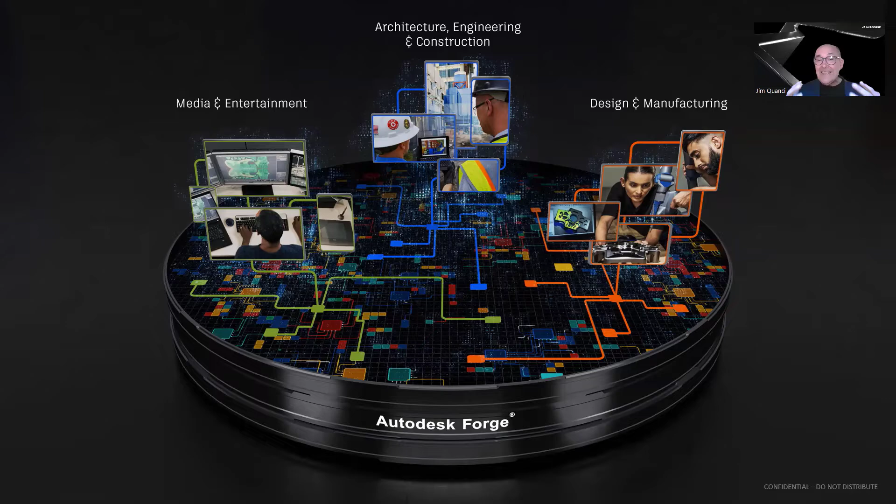for faster, better decision-making. And better, faster decision-making means fewer mistakes, increased safety. It means more profitability. It means giving your customers the ability to delight their customers with the ability for the customers to see what's happening, creating transparency that customers are not used to, because your customers, they don't have a CAD desktop. They may not have a license to one of the Autodesk products, but they need that data to be more effective, to help their business be more successful.

Okay, this is an old slide. What are people doing with the Autodesk platforms? Data visualization, dashboards, still the lead thing that people do with Autodesk platforms once you get beyond the desktop.

Digital twins, all that great digital twin information created on the desktop, but then needs to be shared through dashboards, through pipelines of near real-time data coming from AWS, Azure, Google Cloud, whoever your favorite IoT digital twins provider is.

Pipelines for AR, VR, SaaS integration, whether that's ERP, CRM, or BIM 360 Autodesk Construction Cloud, parts catalogs, configurators and design automation, which very much are about reducing time for designs to get done, whether that's somebody internal to a customer, saving lots of hours in design work, or whether it's enabling your customer to give their customer a delightful, easy configurator experience that dramatically speeds up time from design exploration, looking at your customer's products, to actually placing an

order and it's shipping, that data going direct data form, not files, not drawings, to the shop floor or to the fabrication area in preparation for going out to a construction site.

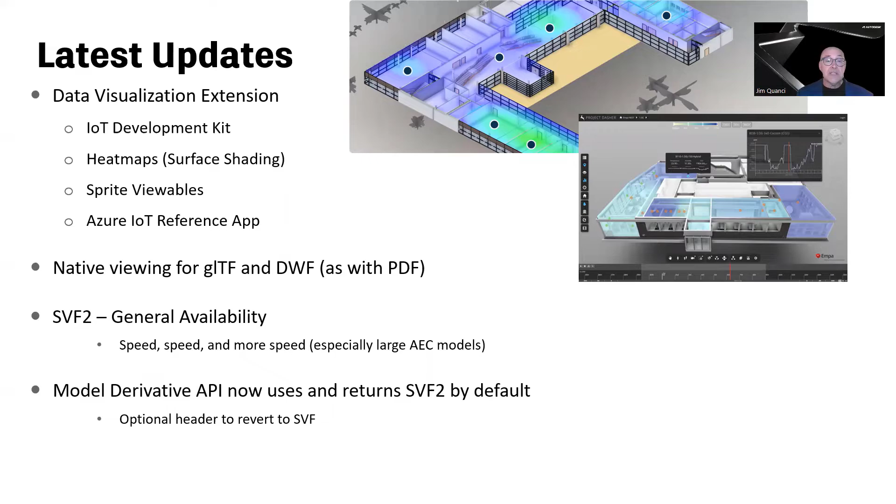What else is coming? Data visualization extension - we're not done. There are a few things left over. People wanted streamlines, easy streamlines - working on that.

Updated three.js. Those of you who use the viewer may have used the underlying three.js, which for the viewer has been at release 0.71. That release, is it 5 or 6 years old? It's aging. The open source community for three.js has built a lot more capability and connectors for it. So Autodesk has recognized we need to leverage the open source community, not resist it, but embrace it. So you should know we are actively working on updating the Forge viewer to support near the latest version of three.js - last time I looked, maybe it was 1.31, 1.32.

We'll see in the next few months - very soon now we will release a new version of the viewer that supports a much newer version of three.js, with the plans, infrastructure, and tooling in place for us to stay up to date. Now, we won't always be up to date with the latest version of 3JS that came out this month - there will be a couple of months lag time for our support of new versions. But I know those of you who use 3JS, hopefully this will really liberate your creativity to leverage a lot of the great plugins and extensions to 3JS.

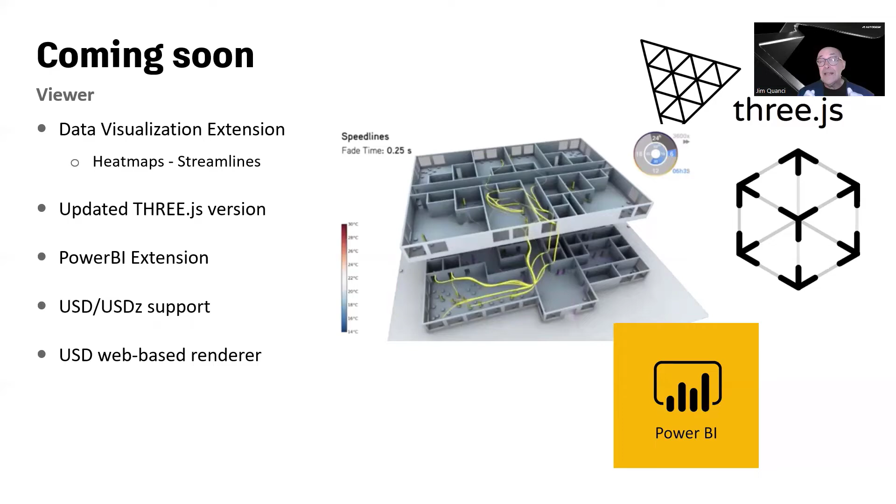Now, will I say it's photorealistic? No, I think that would set too high expectations. But for a lot of use cases, if you're good - this takes a bit of being artistic and using the right materials in the right way - I think for a lot of use cases it will be good enough. Customers will go, yeah, that is good enough. That looks real.

With that, we're going to run a video to make the point about Power BI - this is not vaporware, we're not just talking about it. You'll see how we have a connector that feeds information between the data in the SVF2 file and the visualization, connecting that and making it accessible to Power BI. You can use Power BI for grabbing data, linking data, filtering data, and then within a Power BI dashboard, making that data available in the context of a model.

First floor, second floor, third floor, structural, MEP. Now you've been able to do this today, but it takes a full stack web programmer to really pull it off. This is about enabling the people at your organization or your customer's organization who have Power BI skills and basic database understanding, but aren't developers and don't want to be. It'll be much easier for customers and users to tailor their Power BI dashboards to give themselves and others in their organization exactly what they want.

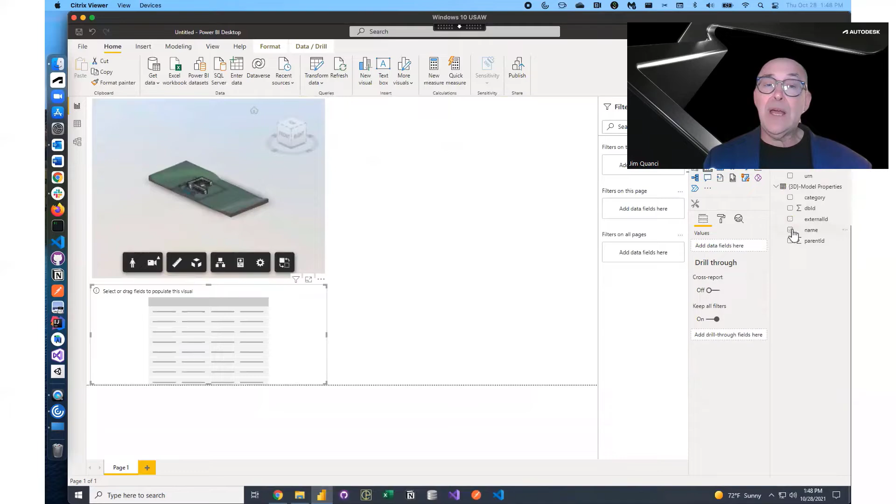Don't you love this little wizard? How to configure the Forge Viewer visual - and this is happening inside of the Power BI desktop. Grab your token - you'll need a Forge license that you would give out to your Power BI experts and power users, so they can take advantage of Forge.

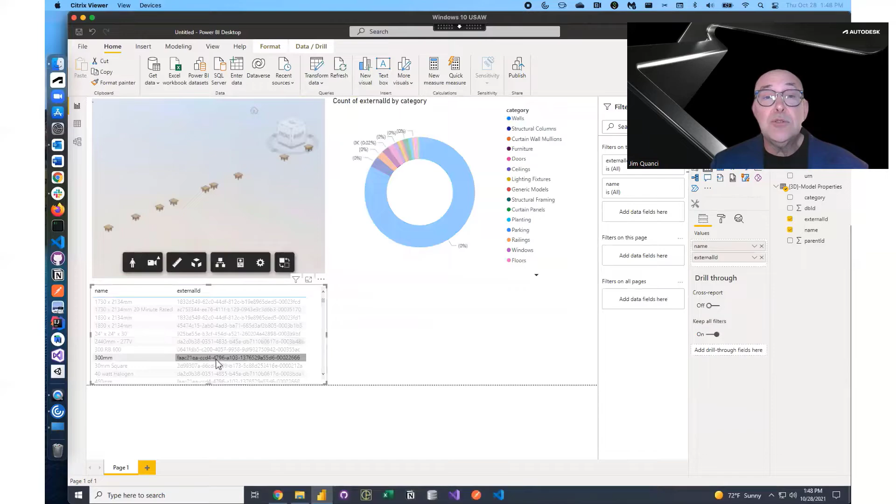You can see that external ID like you typically have in a Revit model. You can see Power BI at use, giving a pie chart view of the data in the model, allowing for quick and easy filtering, and with the visual feedback that is also powerful.

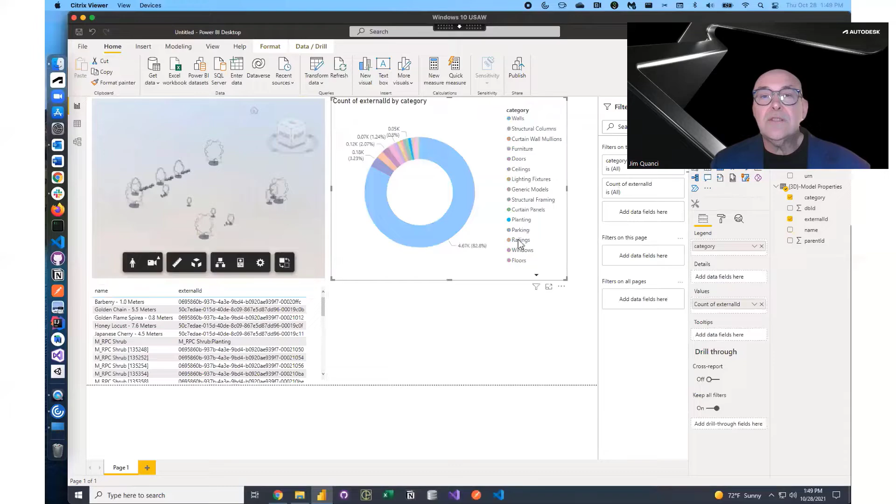Show me the doors, show me planting, show me windows. Easy.

What else with the viewer? Addressing pain points - with model derivative in the viewer, we've been told again and again, not fast enough for large Revit models. People come with 500 megabyte, gigabyte models, and sometimes the translation fails. Not too often, but it does happen with large models, and it's just too slow.

This slide comes from Autodesk University. We talked about the upcoming Revit 2023 translation worker, which is what is on the model derivative services, creating those SVF2 files for Revit. Well, what happened is we decided we can't wait - there is too much demand. Too many people want these improvements, whether you're building your own applications, like a Power BI example.

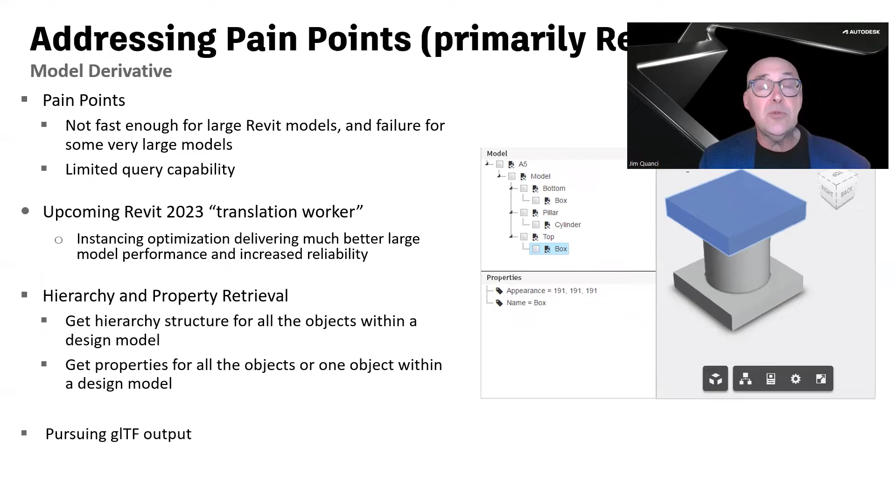There's our customers using BIM 360 in the Autodesk Construction Cloud. There's desktop sharing that happens with our desktops. We needed to do better, so we got our teams together over these last three months and looked really hard at this.

We dramatically reduced the time it takes for a Revit translation to happen, for you to get at the graphics and the metadata in a very large Revit model. We're talking gigabyte-sized models where the publish time, the time for you to get the data, was in the area of 8 hours - and we've got it down to 10 minutes.

There was a lot to this. One of the things had to do with spikes that we started planning for - there were a lot of spikes in the use of model derivative on Fridays. Maybe that's no surprise, because a lot of customers using BIM 360 and Autodesk Construction Cloud publish their work-shared models all at the same time on a Friday.

So we worked on getting more servers available - these tended to be the biggest models, so more big servers available, dramatically reducing queue time. Then we made improvements in the Revit extractor, reducing memory footprints and dramatically increasing the speed of an SVF2 file being created from Revit.

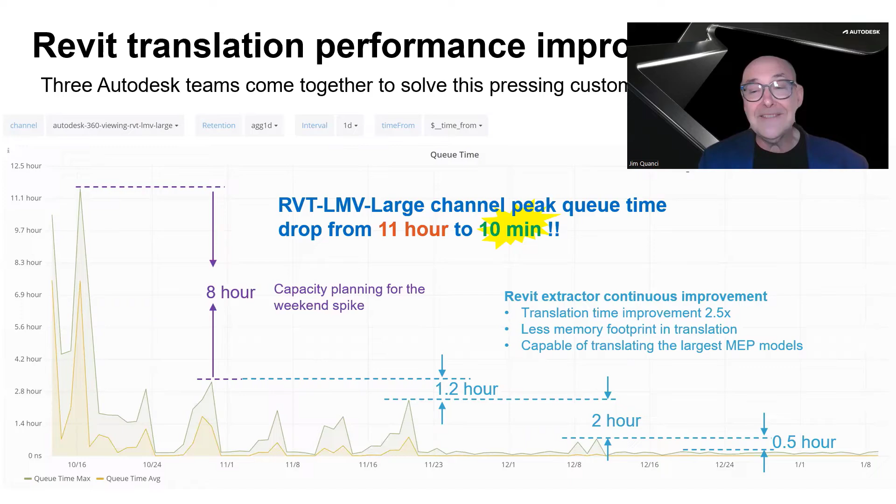There were very large models, especially in the MEP area, that we had problems with from time to time, and most of that has gone away. Now, if you're a user today of BIM 360 or Autodesk Construction Cloud, you've probably seen this already. If you've been using Forge with model derivative and Revit models, you probably noticed the improvements - hopefully this gives you insight into what happened. It got a lot better.

We also have improvements in property data extraction, making things faster with response time to querying. This is very much about querying on the server versus having to get all that information downloaded locally onto your server, dumping it in a database. So you can do much better at querying, much faster, much easier. A little later in this presentation, I'll talk about a new model properties API that has just been released for BIM 360 and the Autodesk Construction Cloud, which really leverages these enhancements in the model derivative service.

So I'm going to move to design automation. Design automation being the service that has CAD engines on the cloud: AutoCAD, Revit, Inventor, Civil 3D, 3ds Max. So all engines, we've done optimization on queue scaling and creating multiple queues. Those of you familiar with working with cloud, whether it's AWS, Azure, Google, know about auto scaling and having servers that are hibernated that can come up faster than starting servers up from scratch. So we've really worked on improving queue management for better performance.

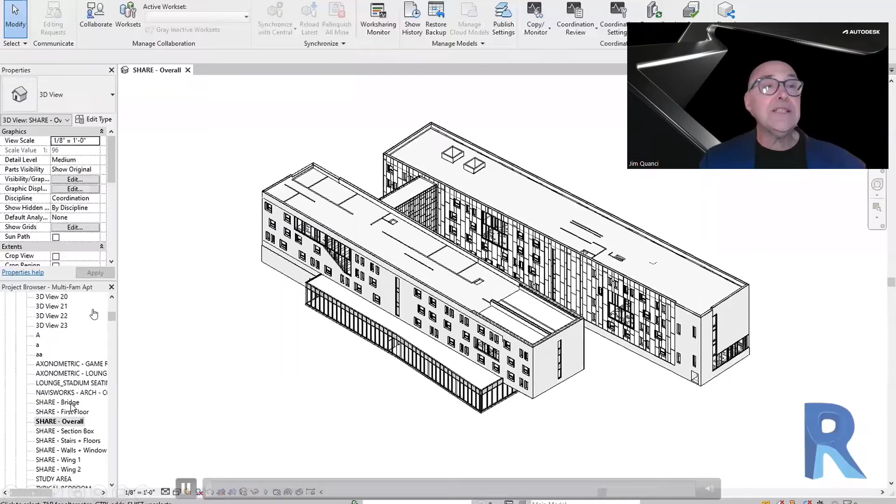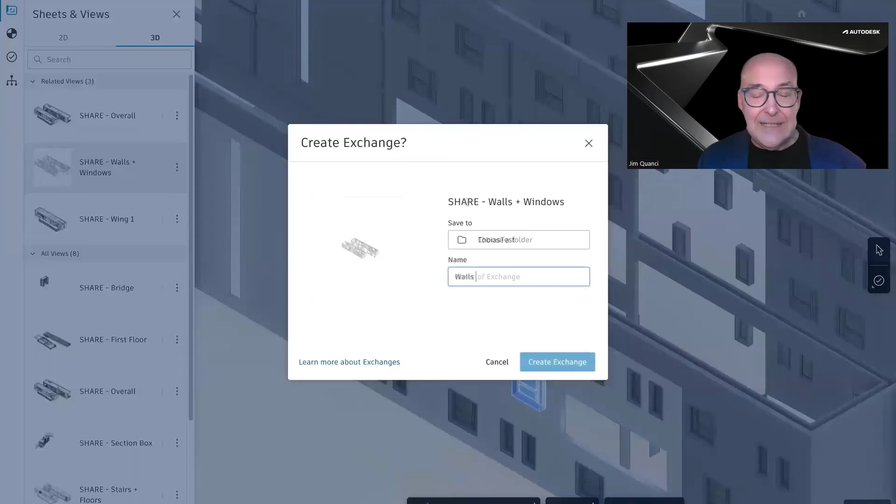With that, let me play this video. Note, we are inside Revit, and we're going to a view. We're using this view in Revit as a filter to decide what model information, what entity information, what parameter information I want to put up in a database on the cloud—in an Exchange database.

And once I share it, I now have synchronization between that Revit model and the database. When the Revit model changes and there's a save, the database changes. Longer term—not in the first few months, but we'll get there—there will be the ability for changes in the database on the cloud, if you give permission, to actually write back into the Revit files.

And here we go, dredging through the data in that view, that Revit view that was used as a filter, which we know many customers use today.

Now, in the short term, these Exchange databases are being stored in BIM 360, Autodesk Construction Cloud. We're heading in a direction where it won't be just BIM 360 or Construction Cloud—there'll be direct Revit to Exchange connectors. This whole connector experience—Autodesk is going to build connectors, and some of you are going to build connectors too—so you can get this data flowing wherever you want it to flow.

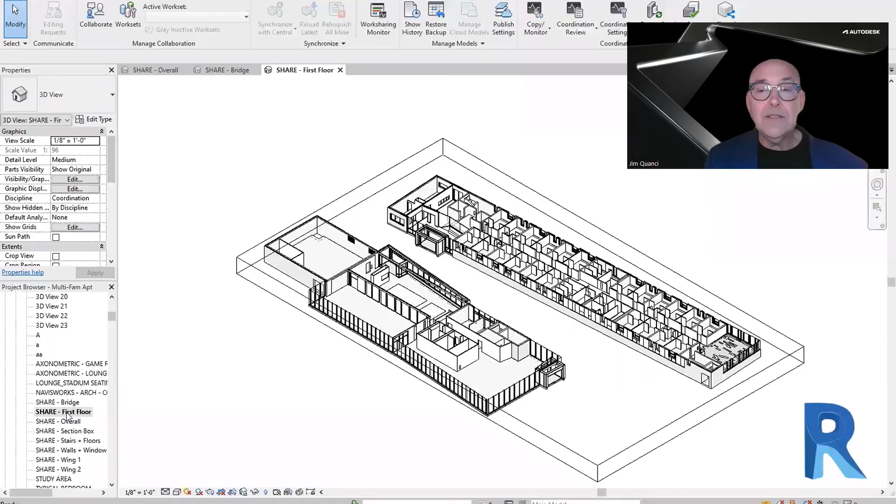Initially, we have this Exchange data flowing from Revit into Exchange, into Power Automate, and from Revit into Exchange, into Inventor. And you tell us—do you want it to go from Revit, or maybe AutoCAD, or Fusion, into some other system you have? Maybe Rhino, maybe SketchUp, maybe P6, Primavera.

So initially it's based on Revit views, initially limited to Revit Cloud work sharing at the publish—just initially. This is what I call training wheels: initially read-only, later write. Later—meaning the first half of this year—there'll be a Revit connector, so you can define exactly what objects you want to move directly from Revit, up to the cloud, constantly in synchronization between the BIM and the data on the cloud, shared with whoever you want.

This is hands-on soon. We're hands-on with about 6 of our partners today, in private beta. We're going public beta in the next month or two—maybe don't hold me to it, it's kind of a week-by-week thing, but it's coming. If this excites you, I'd say stand ready, maybe reserve a week about 6 weeks from now to jump in and try it out, especially if you're a heavy user of Revit and BIM 360 or Autodesk Construction Cloud.

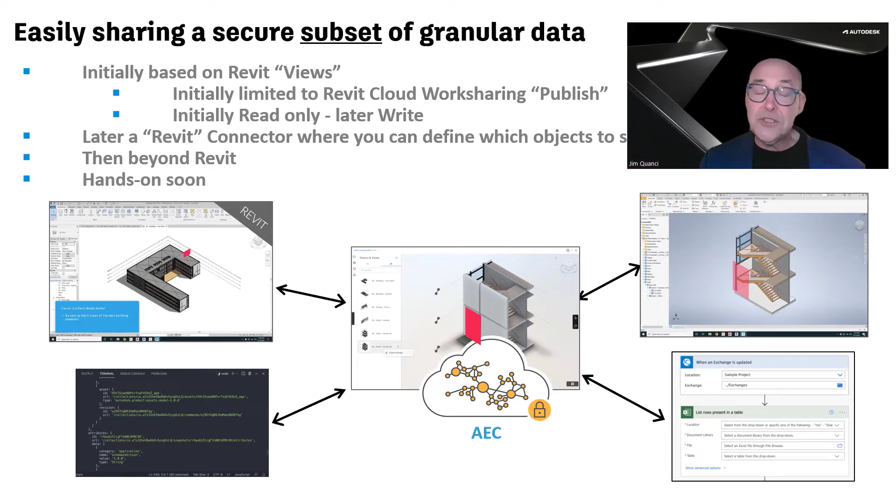So that was data, cloud information models, and Exchange. Again, it's about all of you using desktops to create and maintain data, but it's really valuable to the enterprise, bringing that important data to the enterprise so it can execute on—this will sound familiar—digital transformation. This digital transformation is all about moving data, flowing data.

This is a bit of an eye chart, but I wanted to throw it out there. If you're watching this video, freeze it, because I think all of you need to think about how you access data today from various Autodesk technologies. Many of you have done desktop plugins to get at data, and it happens fast, but you need your own database to stick it in, and you've got to have a desktop. If you don't have a desktop, what are you going to do?

Now we have model derivatives. Those of you using Forge know all about that. It's pulling out a subset of the data, not real time. For some things it may be 10 seconds, for others 10 minutes or 20 minutes for a big BIM model. But we're making improvements, speeding it up. There's a cost involved because of the compute time it takes to decompose your model into data.

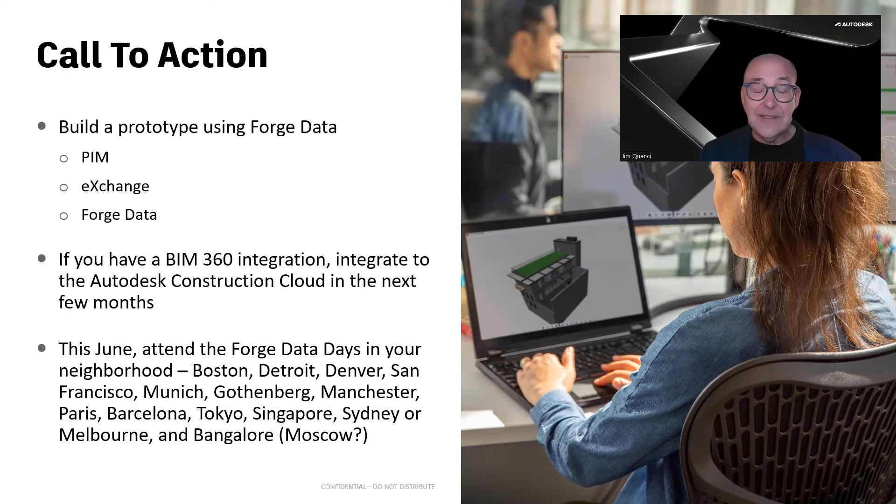I've laid a lot on you. For those of you who haven't started thinking platform - again, frequently when I say platform, I mean Forge, but platform is more than Forge. Platform is the desktop products, it's the cloud products, whether it's ShotGrid or BIM 360 ACC or Fusion or Autodesk Docs, and it's Forge, and it's the cloud-specific APIs that are part of Forge, like you see with BIM 360 and the Autodesk Construction Cloud and with Fusion, and what's coming with Forge Data and with Exchange.

So I'm just encouraging you, get started, start small. Maybe come to one of our accelerators. We can hold your hand through your first simple hello world proof of concept with a model that your customers, your users can relate to. But we really want you to think big as we get beyond this kind of file-bound world to a digital transformation empowering world using all that great design and make data.

And ask for our help. Don't be bashful, don't feel that any question is too simple. Have a bit of courage, we absolutely want to help you. And for those of you who are into the platform deep already, be a squeaky wheel, be demanding. Let us know what you want to do first. It absolutely drives the timing of our investments, the timing of our expansion of the capabilities of the Autodesk platform.